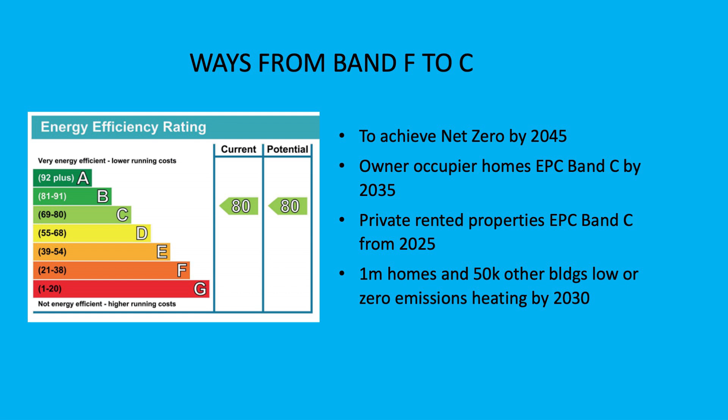Now, I'm not sure where we are on those now because the government recently rescinded its target of 75% reduction in emissions by 2030 in recognition that it wasn't really achievable. But in our view, we have to go on helping people meet EPC targets. And I know EPCs is a controversial area that we've been doing a lot of work on. So our technical team under Roger Curtis, who's no longer with us, but many of you know him, has fairly recently written this guide called A Guide to Energy Retrofit of Traditional Buildings.

So just in the way Marianne was talking about looking at windows individually, start with the easy wins, and pick the low-hanging fruit, as it were, all the things that are cheaper and less interventionist to the fabric in order to improve the building's efficiency and see how it responds, and then gradually move forward. In that way, you have more intelligent decision-making. Not everyone can afford to take that slow approach, but sometimes one change can make an enormous difference.

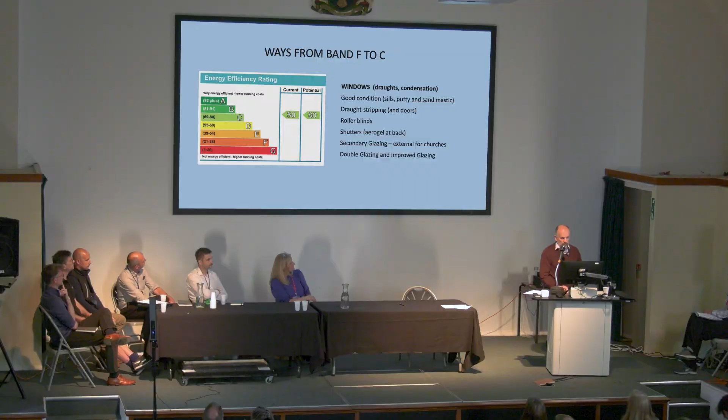So I'm going to skip over all the bit about the science, but I will just talk about the various types of upgrade, which is what I was asked to talk about more generically, and my experience of them, positive and negative. I think I'll just skip that because that's been covered quite well.

So when I started out dealing with listed building consents, there were one or two firms that did traditional sash and case windows with double glazing. And there were only really a couple, and they were very, very chunky. And these were actually great if you had a tenement building which had lost all its glazing in the 60s, and you wanted something traditional looking, and because of the scale of the building, it wasn't really so noticeable. But generally, there was always a need for windows that were more sensitive to the character of the building. So I'll just skip that as well.

So I'll just go through some of the upgrade options in addition to new double glazing. So this is how we've moved forward. All things have been covered already, but secondary glazing is still our favorite. Any glazing that leaves the original window untouched, we're supportive of that. I think there's some work to be done on how much ventilation you want coming through the window on the outside, how much you seal it up. Interesting to hear that being talked about this morning. My view is that if you properly repair the windows so they're a smooth sliding fit and you can hardly feel any draft even on a windy day, just very slightly, that's probably about right.

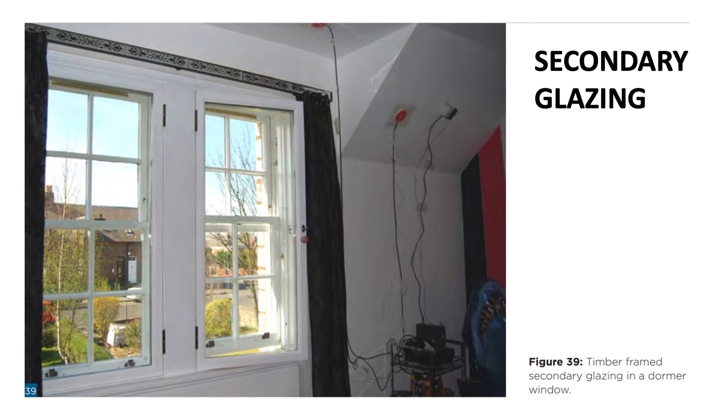So the downside of secondary glazing really is more obvious in Scotland, because so many of us live in tenement flats, and Scotland's towns and cities have very much an apartment block based way of living that you don't see so much in England. So if you're 5 stories up, you really need to be able to swing the windows in to clean them and paint them. And some of the older glazing systems didn't allow for that. And they were also very chunky, like that PVC one you've seen, but very effective at keeping out drafts, and an incredible ability to cut down noise in cities.

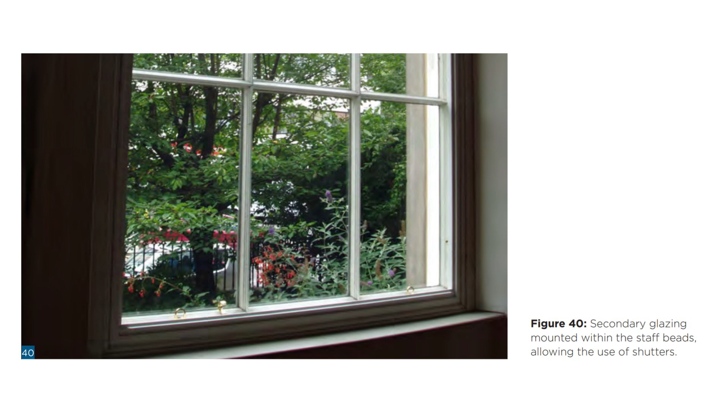So we were all very excited when storm windows came along about 20 years ago, doing much finer secondary glazing to replace a lot of the really chunky things we'd seen. And now we've got these systems like this one by Cocoon, which is the same as Glaze and Save. Cocoon has their stand over there. They've just changed their name from Glaze and Save to Cocoon. And in Edinburgh, owners of large flats with large windows love this polycarbonate sheeting. Again, it gets around any problems with having to apply for consent or fiddle with your windows. So there's two polycarbonate panels there, and they're popped on.

I think the only downside there is the issue about where to put them when you want to remove them in the summer, and also just opening the window if something happens in the street and you want to lean out of the window. But I'm talking from experience there. Putting them in a duvet cover under the bed is a great idea.

Next one, I'm just running through the options. Gecko glazing, I'm not talking about U values though, because that's been covered. Gecko glazing is another option, good because you can open the window if something happens in the street. I think there's a bit of a visual impact here, especially if you've got very slender glazing bars like some of the ones in the New Town in Edinburgh, 15 mil wide.

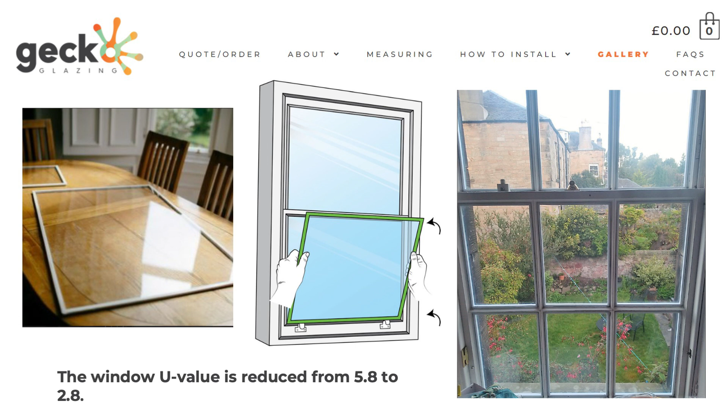But for me, this would be great for a bathroom, particularly where you want to have the window open quite a lot. I think it just raises a general question about the U values that are put forward. How relevant are they when you actually take into consideration how draft proof the frame is? That's the thing I don't have an answer on. Maybe Nick Heath can comment on that.

And then next is improved glazing, which is basically installing new glazing units into the existing sashes. And these are generally slim profile double glazed units or vacuum glass. Now, slim profile double glazing has become very popular in Edinburgh. I thought it was really just something that we let people do if they had modern glass and were desperate for double glazing. But actually the performance figures seem to be quite good on all of these in relation to just having single glazing.

But I think it seems like a lot of work fiddling around with routing out individual sashes. I don't like removing any timber, just as Marianne was saying. I don't like removing any timber from a sash, particularly an enormous Edinburgh sash that's above a busy street. So routing out checks, it's very fiddly, very expensive to do, but some people are prepared to pay for it.

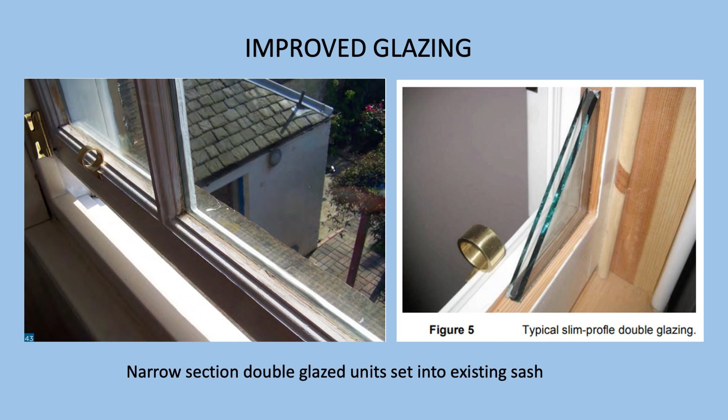I think the downside is at the moment there seems to be evidence that these units aren't lasting very long, and I know some early ones did fail quite quickly, but it would be good to know a bit more about that, really, because they are a good option in some cases. So we did a couple of studies, 2010 and 2013, on a building for a housing association, and we used 3 or 4 different manufacturers, or was it 4 or 5? But I think Nick will tell you about that, so I'm not going to dwell on that.

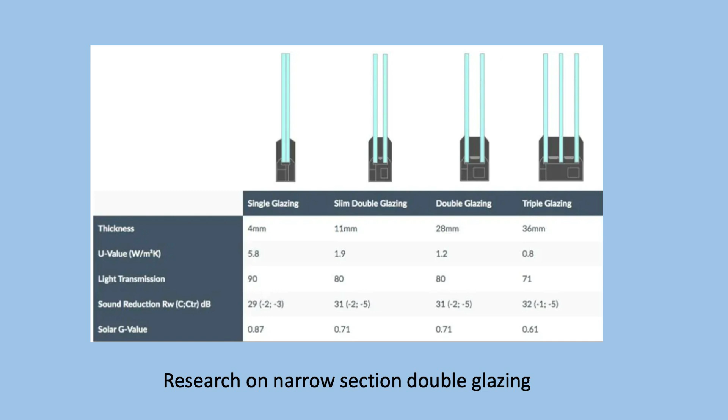I think the only point I'd make, unfortunately, is, of course, people always want products. They always want to phone us up and say, can you give us a product that you recommend? And we can't recommend products because of being a public body. But products are great because they help owners and managers find answers to problems that they have with their building. But some of the manufacturers, unfortunately, I think 2 of the manufacturers that we trialed with here have gone bust. So again, more science, which I'll skip over because it's being covered today.

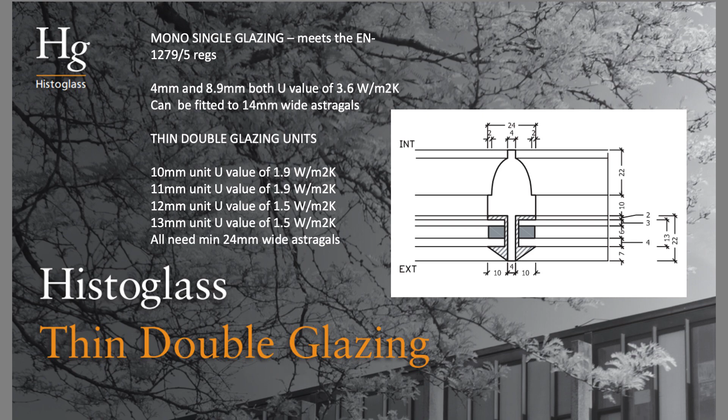But I think the weight is an issue. I think the thickness doesn't matter looking at it. But when you're bumping up the weights in order to counterbalance the added weight of the glass, it's starting to look like it's putting quite a lot of strain on the pulleys and the ropes. So I had to pop in and replace a rope that had snapped just a couple of months ago. And also the cost. It's £1,000 a window just for the glass. So it's quite a serious financial commitment.